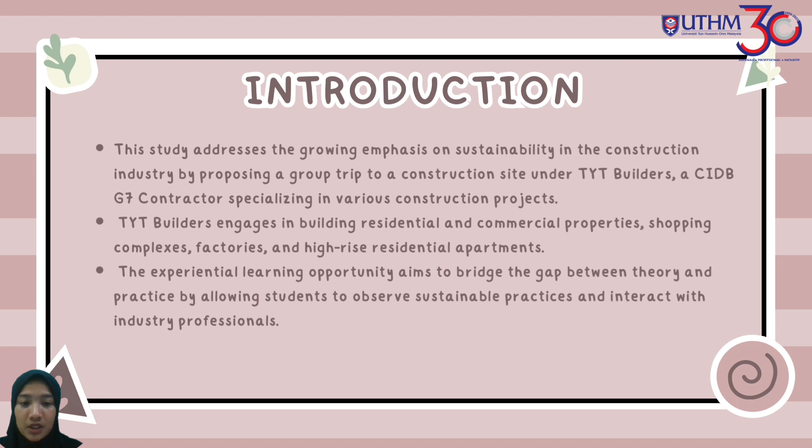This study emphasizes sustainability in the construction industry through a proposed trip to a construction site under the TYT Builders. The experiential learning opportunity aims to bridge the gap between theory and practice by allowing students to observe sustainable practice and interact with professionals.

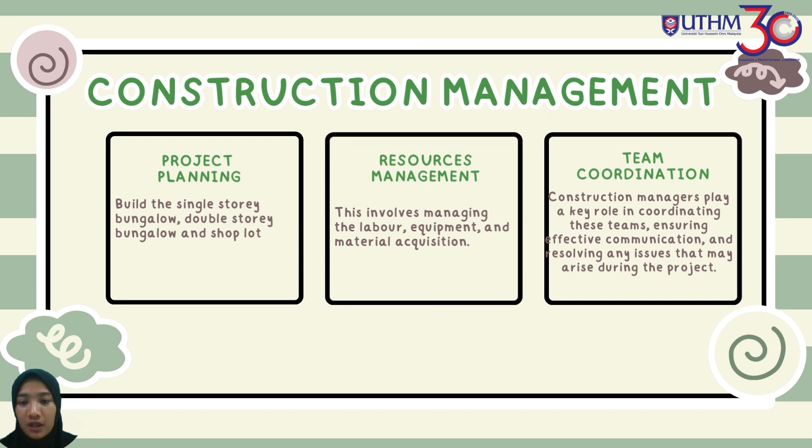The example for construction management is project planning for the single-story bungalow, double-story bungalow, and shop lot. Resource management involves equipment and team coordination for ensuring effective communication and resolving any issues that may arise during the project. Another aspect of construction management is budgeting and cost control, scheduling, and quality control.

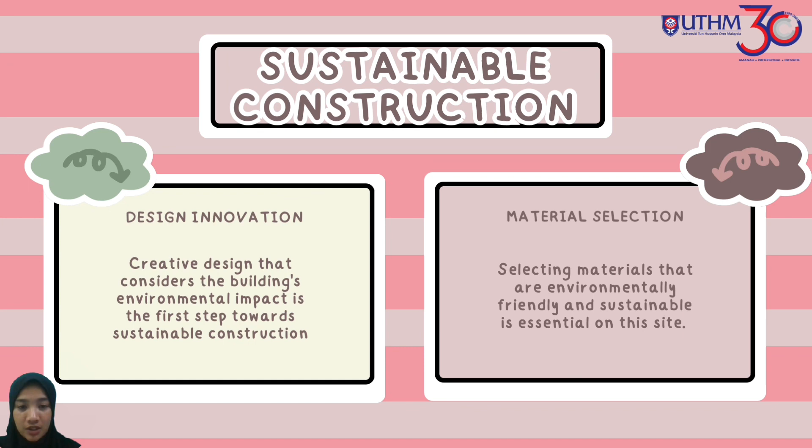For example, sustainable construction involves design innovation and material selection that are environmentally friendly and sustainable, which is essential on this site. Energy efficiency and life cycle assessment are also examples of sustainable construction.

The objectives are to investigate how construction management and sustainable techniques are used in actual practice, and to understand the challenges faced and solutions implemented to promote sustainable practice.

Each construction project has its own distinct features. The range of projects selected for analysis may restrict how broadly the results can be applied. Limitations of this site analysis include possible ethical issues and the inability to quantify long-term effects.

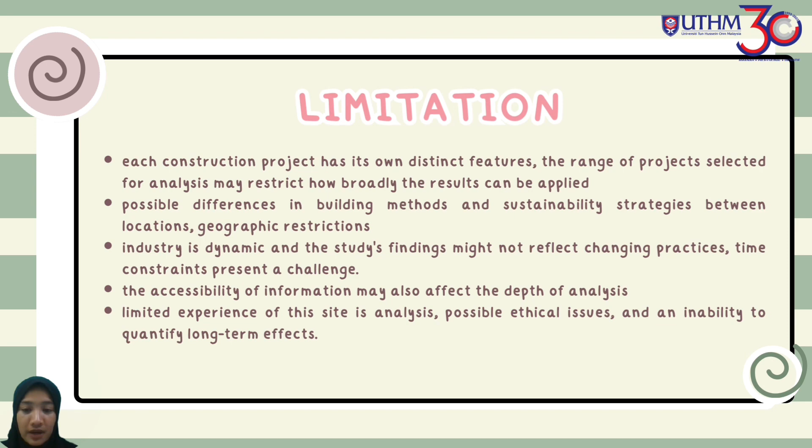All the information was gathered through an interview session at the site construction with the Assistant Project Manager, Encik Samsul, from TYT Builder Sdn Bhd.

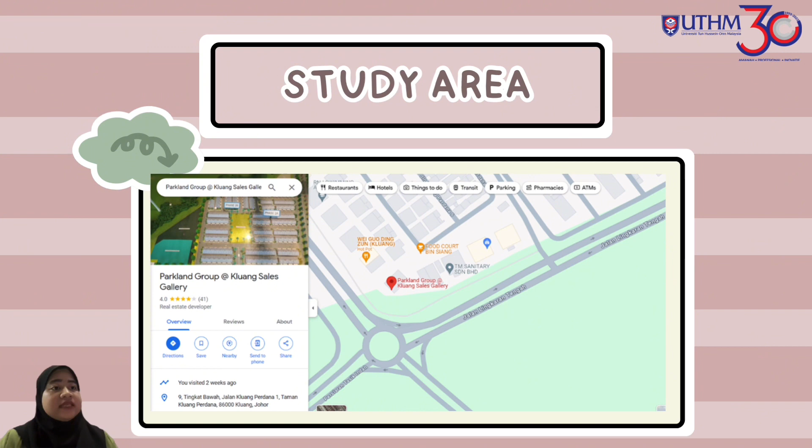This is the location of the office, the TYT Builder site office. The planning of the site includes building single and double-story bungalows, semi-D bungalows, Rumah Mampu Milik Johor, and terrace houses.

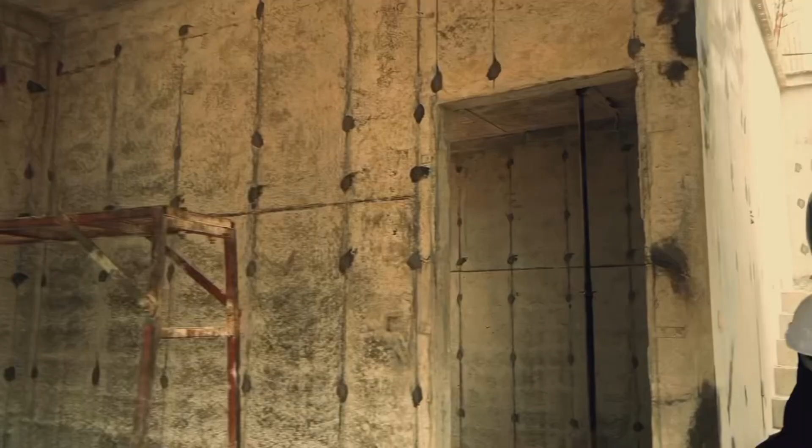Aluminium formwork was used at the site we visited. As is common knowledge, conventional formwork made of wood is frequently used in construction in Malaysia. Aluminium formwork can withstand the pressure of freshly mixed concrete better than conventional formwork.

Apart from this, aluminium formwork offers a superior surface finish and does not require the application of plaster, while traditional formwork frequently requires plastering. Additionally, construction time can be saved because this method eliminates the time for bricklaying. For waste prevention, the site looks tidier and cleaner with less debris since the formwork uses aluminium.

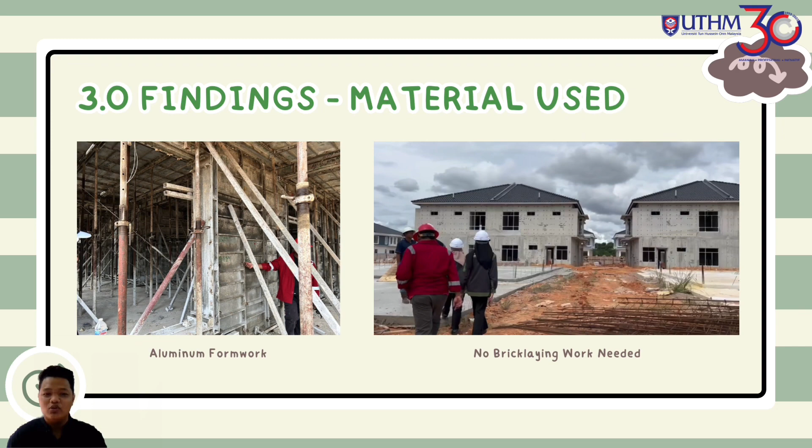The site looks tidier and cleaner with less debris since the formwork uses aluminium. It has been seen that the trash is organized in an orderly manner. Using the 3R principle - reduce, reuse, and recycle - the site effectively lowers the amount of trash produced, promotes the reuse of materials, and ensures recyclable trash is handled properly.

When this effective waste management strategy is used, not only is the construction site kept clean and well organized, but the project also has a much smaller effect on the environment. Consistent waste removal prevents the build-up of debris, which has the potential to obstruct work and present hazards to safety. Next is reduce, reuse and recycle.

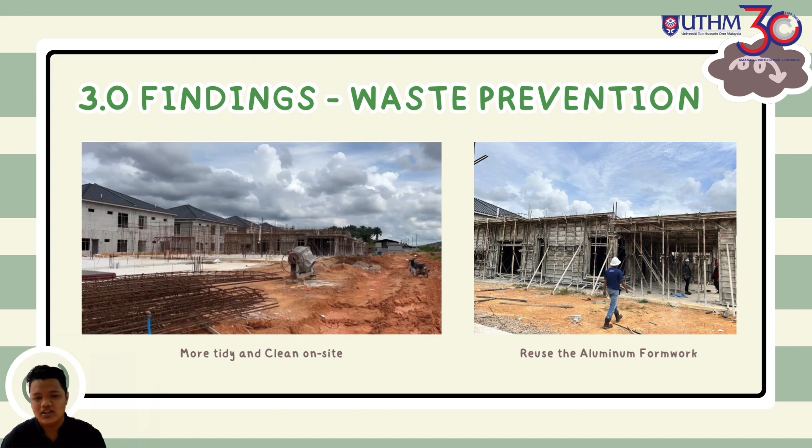Encik Samsul also told us that the aluminium formwork is a reusable material that can be assembled easily multiple times. By reusing aluminium, we contribute to environmental protection and also reduce construction waste.

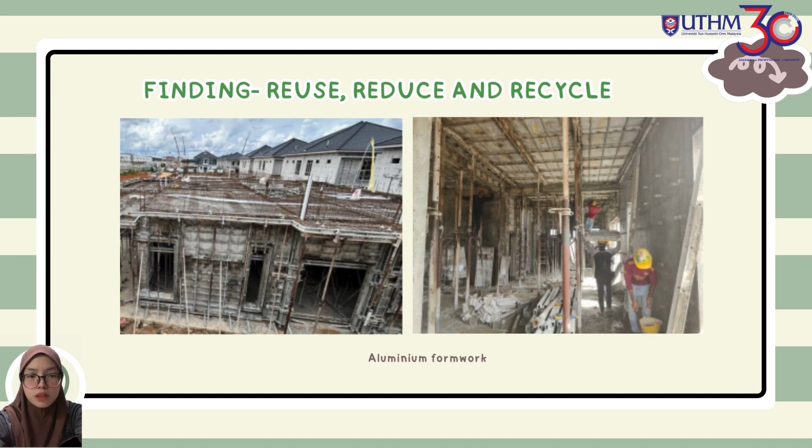Occupational Health and Safety (OHS) involves identifying and preventing workplace hazards through control measures. Construction workers wear full safety clothing, with safety managers inspecting facilities and ensuring compliance with regulations. Site-specific safety procedures are emphasized in morning briefings.

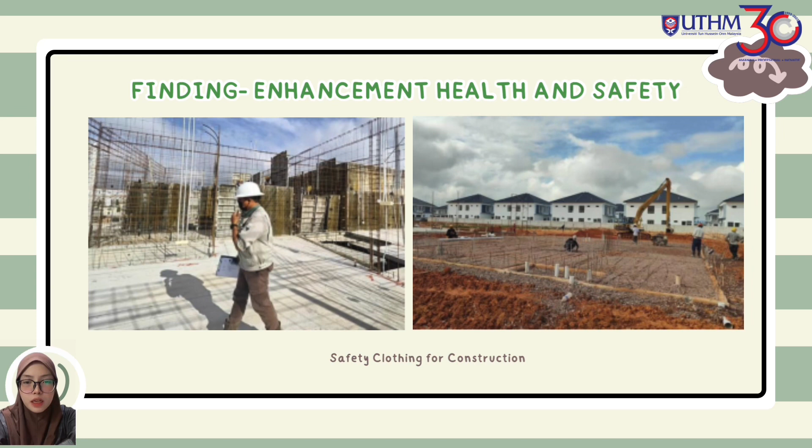Next is clean energy. The construction site we visited uses electricity from TNB with diesel as their energy source. There are 4 renewable energy sources for powering construction sites: solar, wind, hydroelectric, and hydrogen power cells. They do not use clean energy.

For building and material use, the site visited utilized metal hoarding construction for safety, security and protection. Promoting sustainable resource management, the hoarding components could be reused, saving costs during construction and contributing to recycling.

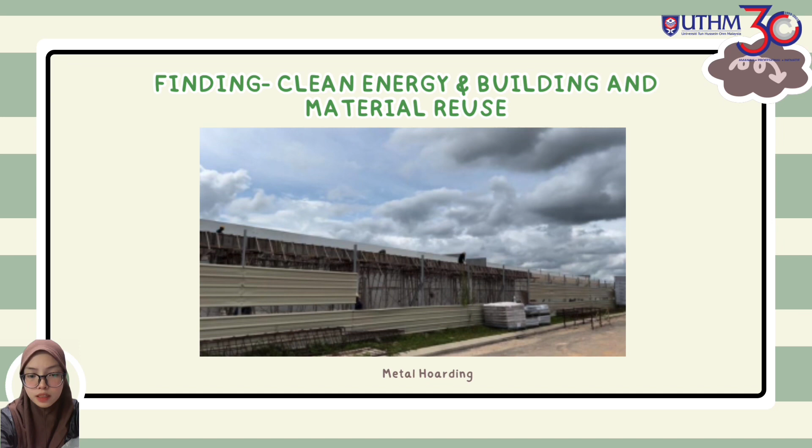Lastly, for indoor environment quality, during our site visit we highlighted the importance of indoor environment quality (IEQ) in the construction site. Worker facilities including rest areas and hygiene facilities are crucial for team well-being and productivity. This space provides a comfortable, rejuvenating environment during breaks, fostering a positive work atmosphere.

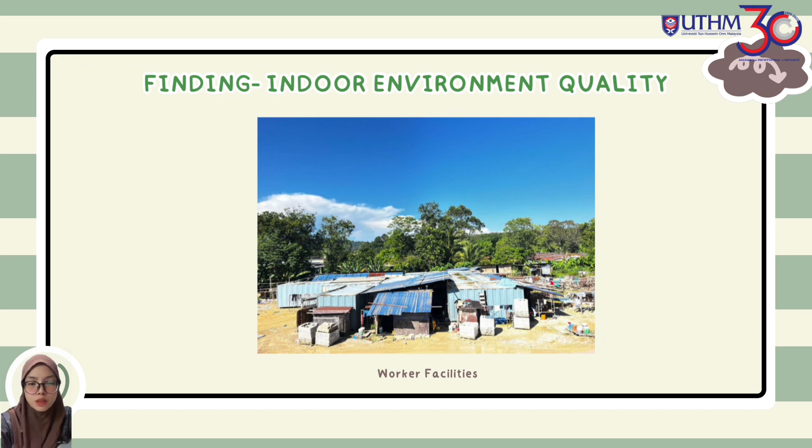Comparison of construction practices and sustainable approaches. First is the waste management process, which is being implemented at the site construction.

The person in charge of sustainability is responsible for making sure all waste is disposed of and segregated according to its type. The waste bins, known as roro bins, are used, and there is a schedule for the waste to be collected.

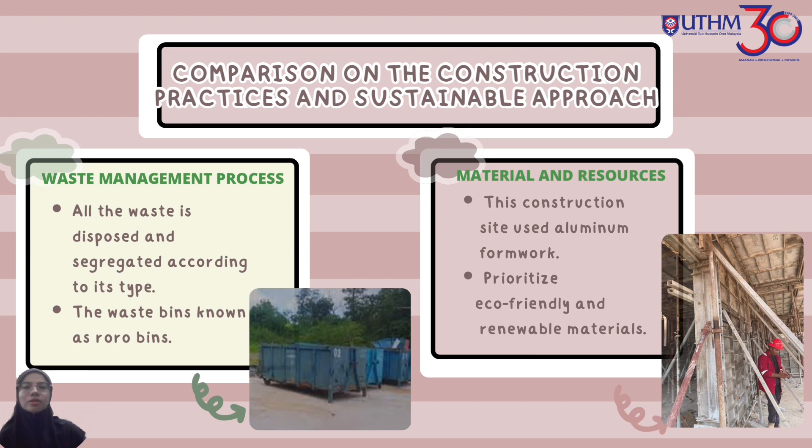Second is material and resources. In the site construction, they use aluminium formwork. The sustainable construction approach prioritizes eco-friendly and renewable materials.

Barriers to sustainable implementation in construction. The construction industry faces several barriers to the sustainable implementation of practices. There are some barriers to sustainable implementation in this construction project.

First is cost and financial constraints. The higher initial cost, as the perceived return on investment may be uncertain or require a longer payback period. The developers and contractors for this project are driven by a market that prioritizes immediate financial goals and faces uncertain market demand.

Second is lack of awareness and education. For this project, stakeholders including developers, contractors, and even consumers are not fully informed about the benefits and long-term value of sustainable construction methods. Without a clear understanding, decision makers default to conventional methods, perpetuating the status quo.

Last is short-term project focus. This construction project prioritizes immediate goals to complete the project within a time frame and minimize initial costs, which leads to the neglect of long-term sustainability considerations.